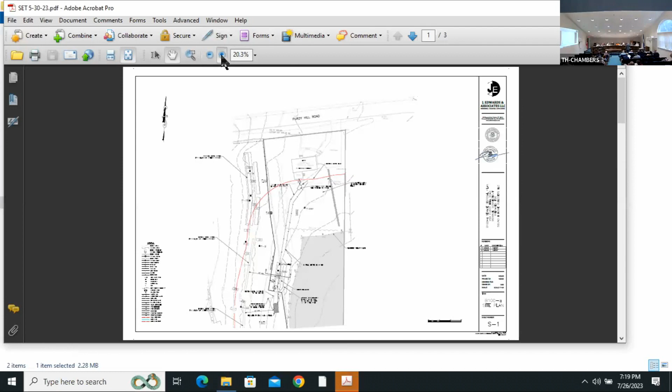Jason kind of went a little overboard the last one because it's just a determination. Yeah, kind of got into the whole detail, so just quickly, it's a little bit of a unique situation.

This is called Crossing. For the record, Jason Edwards, J. Edwards Associates, Engineers Surveyors, 227 Stephanie Road in Easton. Public Crossing is the new condominium development being built on the corner of Purdy Hill Road and Cutler's Farm Road. It has a valid wetlands permit and is under construction, probably 75% complete.

The builder was going to be here, he may show up any minute. But what they're trying to do is, part of that original parcel there was an existing house at 269 Purdy Hill Road. The zoning requires a minimum of 9 acres to do their condo development, so they got approved with 9 acres. One of the conditions of approval was to demolish that existing house.

Now, considering the housing market and the lack of available housing in Monroe and elsewhere in Connecticut, they've decided they'd like to try to keep that house and sell it to someone else, or make it part of the condominiums. They're not sure, but they don't want to demolish it. So to do that, we had to find a septic area. One of the constraints is this existing house.

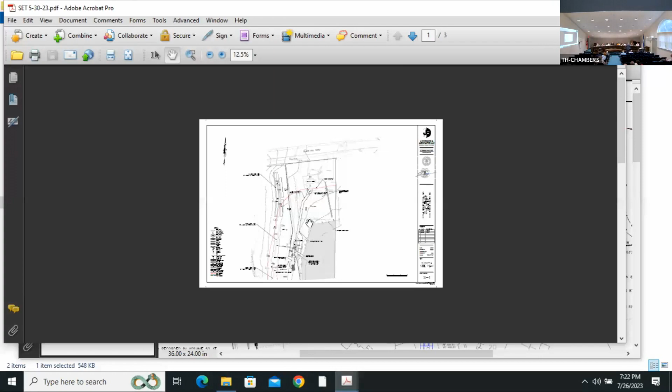So really, there is no regulated activity proposed at this time. The only regulated activity is to relocate the footing drain. There's an existing footing drain that's been installed as part of the approved condo development. So to make enough room, we have to maintain a 25-foot minimum separation distance from that to the new septic, if it's installed.

So we have to slide that over. The existing one is right in there, we have to reroute that pipe and move it over to here, so that they can have that separation distance and have a septic area there. So that's the only regulated activity proposed here. And that's an active site, I don't know, that hill's stabilized, I don't think it's fully secure.

So this is, before you for that movement. And this is also a subdivision, so we have to be before you to review the subdivision as well.

Any questions, I'd be happy to answer.

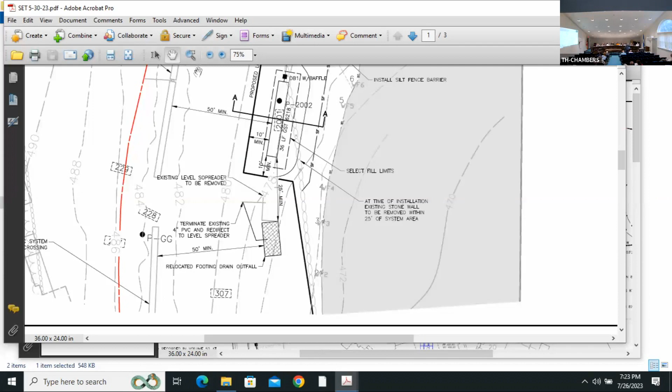One other thing, septic repairs - I know in the past they've been an administratively approved item. If there's a system failure, there was a memo from the former town engineer indicating they were exempt, not from wetlands regulations, but something allowed administratively. I don't know how that bears on this application, but I'll put it on the record. If it's approved, whenever they do it, they just go file it.

Okay, so this is hearing material, there will be a public hearing for the planning and zoning. Motion to go to a regular meeting from Mr. Stewart. Have a second? Second, Commissioner Lyncham. All in favor? Aye. Motion passes. Thank you.

Citizens report recommendation to the Planning and Zoning Commission, IWC 2023-06, file 1449, 269 Purdy Hill Road, subdivision referral, Planning and Zoning Commission. That's exactly what I gotta do, just state that, right? If you want to give a report and recommendation to the planning commission, because they're reviewing it for subdivision right now.

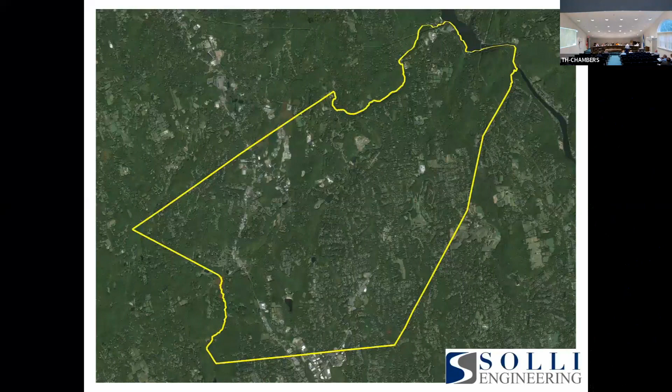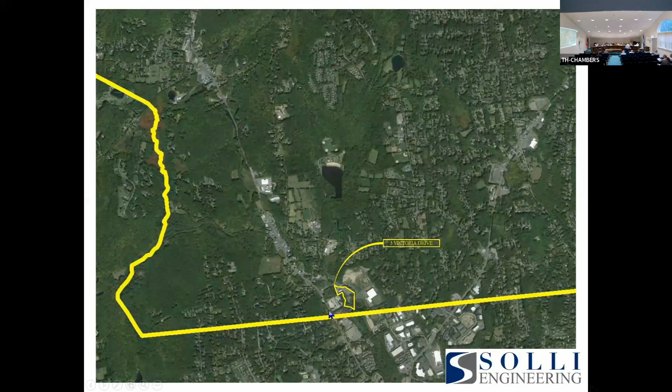We're going to talk about 5 Victoria, which is a proposed field expansion. So this is a map of the town of Monroe, and if we zoom in along the Monroe-Trumbull border, 5 Victoria - if you proceed north on 25 and make a turn onto Victoria Drive, it's located here. It's currently developed as Ole Soccer, a year-round indoor-outdoor soccer facility with various training programs and soccer skills camps. It's been before the commission, I want to say, for the third time now. The first time was the original approval for the Ole Soccer building and the field in the back. There was also substantial wetland remediation and wetland creation done. That was all approved by this commission around 2014, 2015, and subsequently installed, with approvals and sign-offs granted around 2017, 2018.

And also in 2021, there was a proposed 22,000 or 25,000 square foot expansion. We were hoping to get it to indoor-outdoor across the facility, but it didn't work out between the owner and the applicant.

That was also headed for approval about 2 or 3 years ago. Some of you on the commission may remember this application. We are here before you to seek an inland permit for a field expansion.

So currently, this is a little bit about the project. Our client can only hold 7v7 league games in this field. It's just too small for the regulations. So we're seeking to expand it about 15 feet in one direction and 20 to 25 feet in the other, in order to accommodate 9v9 and 11v11, the typical soccer games, if you will.

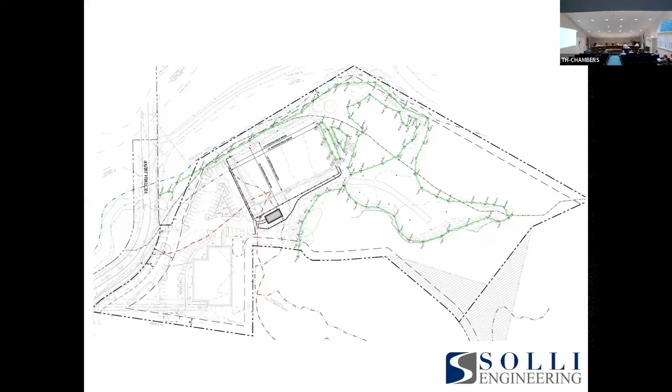Can you give us a better indication of where the expansion is going, in what direction? So if you look here, this faded gray line that runs along the edge, coming out to this, is the new fence line here. And then this gray line here, we're expanding out 15 feet to this new fence line. So it's 15 and 25. Yep. And how far, 26 or 27.

How far is the limit of disturbance to the existing wetland line? So we are grading down, so we can move the swale here, and then there's some grading over in here, but then we're just simply connecting into the existing field topography. So it's a less than half an acre disturbance in the upland review area, and there's no direct wetland impact.

Well, can I ask a question? Go ahead. You're talking about removing invasive species along the river. That's correct. And there's quite a bit here. I'm just wondering, why do you have to do that? Why can't you leave that invasive species? That's a riverbank right there. That's correct, the whole length of that field.

That's just something that was identified as one of the comments from town staff. We listed a bunch of different methods as well for invasive species management. So if the commission wants us to only remove those areas outside of the riverbank, on the other side of the wetland, we're more than amenable to whatever the commission deems appropriate.

What is the method? So there's multiple methods that are approved by Connecticut DEP. We list them all in here, on the plan set, they're on sheet 2.61. There's the manual removal, that's going in there pulling out the invasives. Essentially Roundup, which is a chemical to spray to disinfect it for spot treatment of some of these items. And there's another 4 or 5 different methods that are approved by the DEP that got this landscape approved.

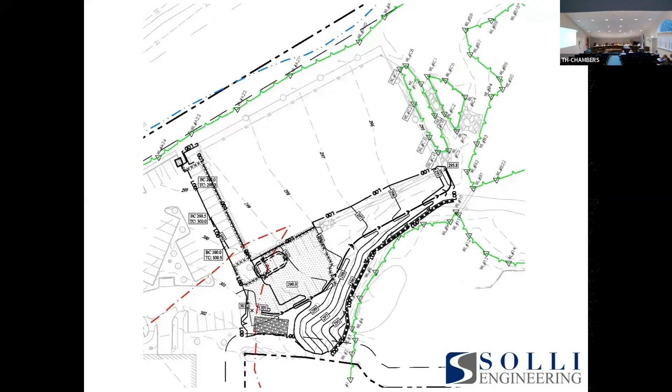So these are growing along the river on the bank? Correct, that green line. Well, not really — it's the check mark line. I have it actually in that orange area. They're growing into the bank. Yes, on the bank.

I don't know about this hatch area, but in my opinion, mechanical removal works, though it loosens up the bank. Then you get rain, you get runoff, and now your fines and dirt are going into the river. I would be for either leaving them or...

I believe when you treat it chemically, you cut it down to the stump, and then you brush something onto the actual stump — applying it directly into the wood, right? I believe so, but I think they can also use a spray bottle. Again, it's listed, but they're not spraying the vegetation of the whole plant to kill it. They're going to cut it and just try to kill the root.

Correct, and that doesn't disturb the bank. Yeah, theoretically, it shouldn't disturb it at all, because whatever grows in its place — whatever species they want — will restore the bank and keep it secure while those stumps rot away over time. That to me is better than either option, because I don't know if the chemical part involves spraying the whole vegetation to kill the whole bush, or just treating a stump.

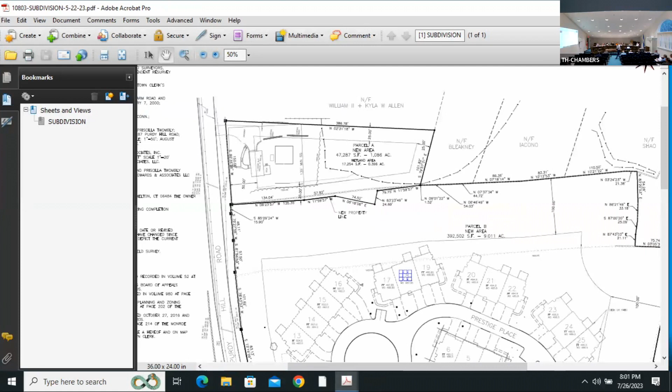All right, moving along to committee uses as of right, IPU 2023-03, file 1451, 228 Pepper Street, town of Monroe Rail Trail. Proposal by the Department of Public Works to pave two existing gravel parking spaces to create ADA compliant access, IW regulations, section 4.2.

Good evening, everybody. For the record, James DeMayo, town engineer. The Parks Department got a complaint requesting ADA parking spaces along the trail. This is at the intersection of Pepper Street and Cutler's Farm Road.

It currently has a processed parking area already. We identified a good location for proposing handicap parking spaces. Essentially, all we're going to have to do is pave the area to make it ADA compliant and stripe it. There's no grading necessary, no other disturbances—just paving that one area that's already being utilized as parking for ADA purposes.

My only question is, shouldn't they just pave the whole trail to make it ADA compliant? They could, but that's not the current complaint. With ADA, we're just required to provide access to all the amenities, which is what this is doing.

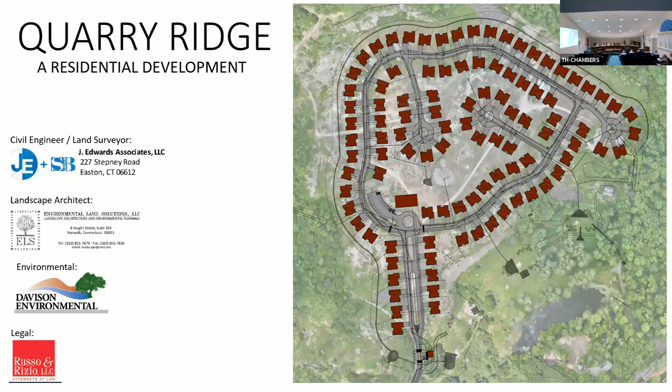This is called Quarry Ridge. It's a residential development, the site of what's long known as the Wren's Quarry. It's located on a 147 acre parcel east of Pinto Lane and Calvert Court, with frontage access on Turkey Roost Road.

It's got a series of ponds along the south and east, as well as wetlands that run southeast from the northwest corner. As you can see in red there, the majority of the proposed development, or really all of the proposed development, is within the former quarry site.

This is just some of the overview. As I said, 147 acres split between 5 parcels. The total wetland area on the property is 15.7 acres. The 99 acres of the property proposed for development is zoned MFR, multi-family residential, which allows for this. It's proposed to construct 99 single-family homes on this property, as well as dedicating 81 acres as permanent open space.

Development's going to be served by public water and an on-site wastewater treatment plant that will fall under Connecticut's Department of Energy and Environmental Protection jurisdiction. Most importantly, no direct wetland impact is proposed. We're all within upland review areas of our proposal.

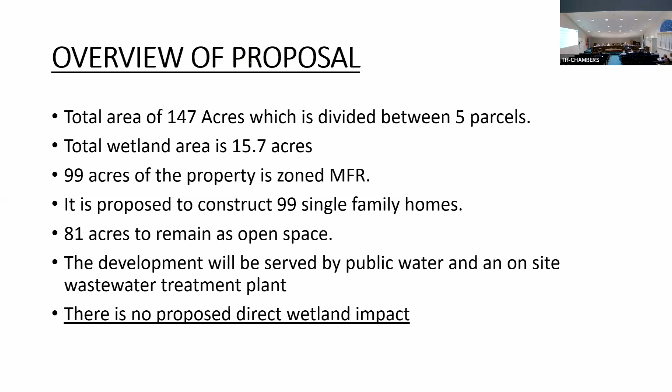Just to take some definitions from the town's regulations, these define a significant impact according to the wetland regulations of Monroe: any activity involving deposition or removal of material which will or may have substantial effect on the wetland or water course, or on wetlands or water courses outside the area for which the activity is proposed. We have no activity proposed within the wetlands, no deposit of material.

Any activity that changes the natural channel or may inhibit the natural dynamics of a water course system - we have no proposed activity which would change the natural channel or its flows. Any activity which substantially diminishes the natural capacity of inland wetlands or water courses to support aquatic plant life - no proposed reduction of the wetlands capacity is proposed.

Any activity which is likely to cause or has the potential to cause substantial turbidity, siltation, or sedimentation in wetlands and water courses. Our design also includes extensive stormwater treatment design and erosion controls that all exceed any guidelines that DEEP has, whether it's the 2002 erosion control guidelines or the 2004 stormwater guidelines.

Any activity which is likely to cause substantial diminution of flow of a natural water course, groundwater, or wetland water course - none that will reduce the groundwater flows. And any activity which is likely to cause or has the potential to cause pollution of a wetland or water course.

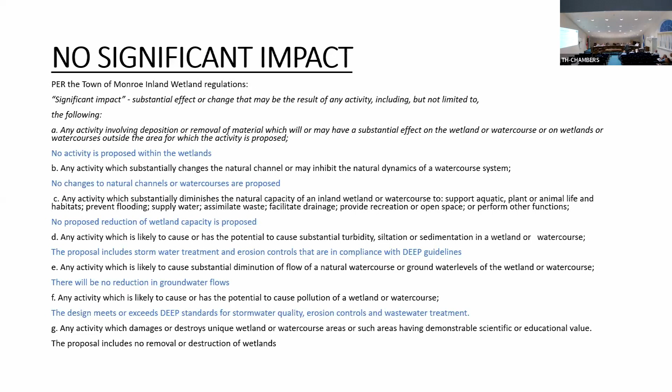Just to give some history, this was, as I said, the former Wren's Quarry. I believe it was started back in the 1940s illegally - there was no permits for that. It ran afoul with the town on and off. In 2003, the current owner purchased it and came in with plans to remediate the site. In 2006 those were approved, and he began work on the remediation, completing it to what it is now in 2010.

At that point, the economy had fallen off a cliff, and the financial viability of building the homes didn't work, so everything sort of paused. So really, the site's as it was left in 2010, stabilized and kind of barren since then.

Can you go back to that, please? Yeah, I've got it on the next slide.

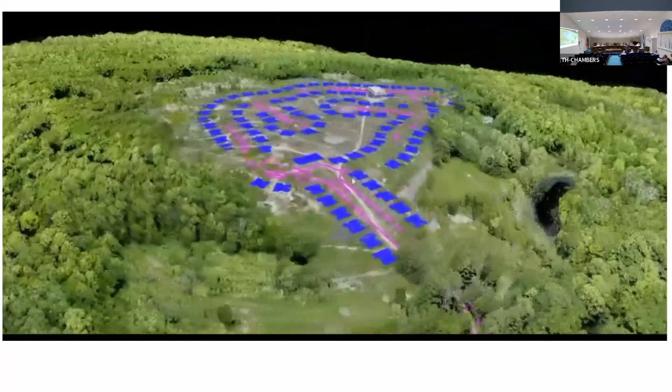This is a little bit shakier camera, I apologize. But this is, the blue is where we are proposing all the homes. Purple would be the road. It's tough to look at with the jerking so much, but you can see it's all within the disturbed area. We're not proposing to construct any homes outside of what's already been disturbed. That was the intent of the original remediation, to create a site on which we can then come back and construct the homes and limit the disturbance outside of this area.

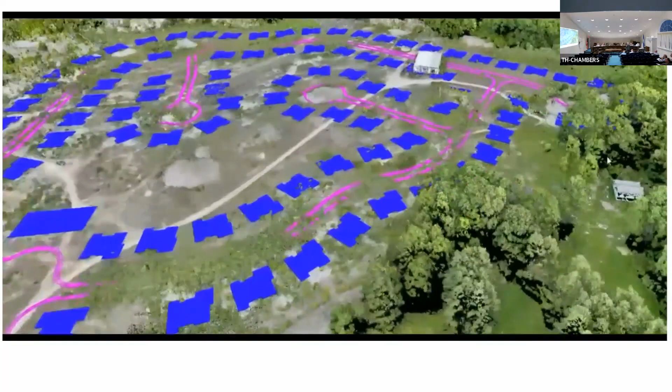So you can also see, go back after this, just to show how much open space there is surrounding this property and how much we're preserving. If you look here, you can see it's a vast amount of green around this, and we don't plan to take virtually any of that down. There's a small area by where that rock outcropping is in the top left corner, where a septic area is to go, but beyond that, it's going to stay.

You can see, you can't even see any houses in the distance. I think the closest house is about 1,200 feet away from the edge of our development. So that area there would all remain open space. That's the 80 acres of open space that we're proposing. The far house, that's Pinto Lane in the distance.

So that access drive you see coming down the hill there, we're going to be following that same path to come up. We have to improve it, widen it, make the grades conform to the town standards in that range. But essentially, we're following the exact same path.

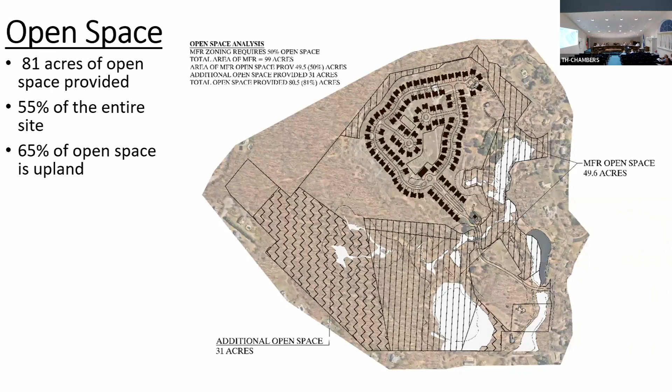So again, just to touch on the open space, and I think that's a key point of our application, is that the open space provides as much, if not more, protection to the wetlands than any other remediation or mitigation or prevention of impact. Providing this amount of space surrounding the wetlands is, in my opinion, the most impactful effort we can make to protect the wetlands. We're proposing 81 acres of open space, 55% of the entire site, 65% of that open space is actual uplands, not wetlands, area that could be otherwise developed.

Again, just to reinforce that point, this is from the NEMO website, which is the Center for Land Use Education and Research. This is a quote from that site: permanent protection as dedicated open space is the ultimate way to ensure that riparian corridors and other critical areas throughout a watershed continue to perform their important functions. Open space acquisition by municipalities and nonprofits like land trusts continues to be the foundation for land protection in Connecticut. So, like I said, as they state, it's the ultimate way to ensure protection.

Just to outline what our limited regulated activities are.

And then we are proposing a small water quality basin to capture the runoff from that area and treat it before it enters into the pond. That design has all been provided, the calculations have been provided, and it's in line with DEEP guidelines.

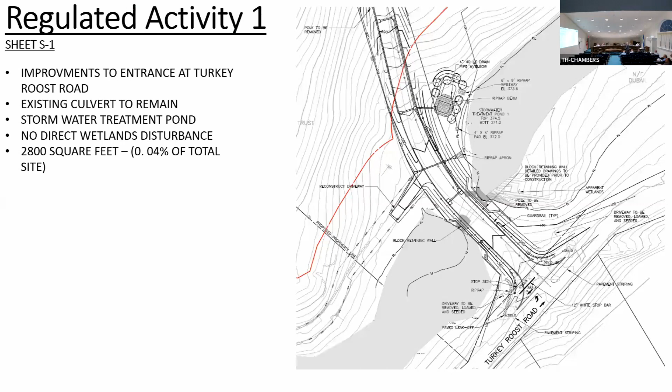No direct wetlands disturbance is 2,800 square feet of regulated activity, which is 0.04%. So that's 4/100 of the total site.

This is activity number 2. Again, it's at an existing culvert, very similar to the last one, really. We're crossing the pipe that's already there. We're not expanding that culvert, we're just filling on top of it.

We have no direct wetlands disturbance. This drainage is piped back up to the ponds on the top right of the screen there, goes out through that pond. This one, we have 12,000 square feet of upland review area impact. That's 0.2% of the total site.

This is regulated activity 3. This is our water treatment ponds. We've got 3 of these proposed in this area. Only one of them, the actual pond, is in the review area, which is the one on the lower left of the screen.

There's new piping, standard stormwater basin materials. These are necessary to treat stormwater before we supply out into the existing pond system.

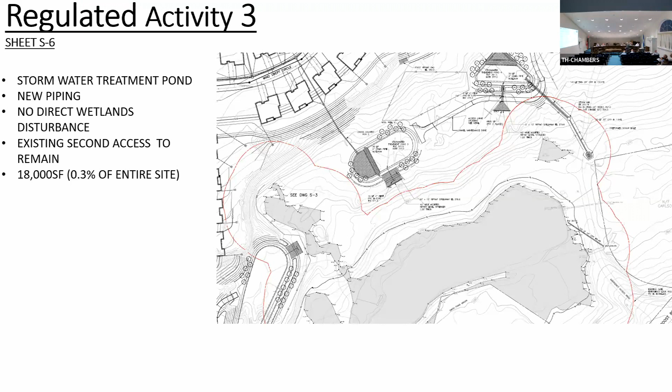This is 18,000 square feet. This is our largest upland impact, upland review area impact, and that's 0.3% of the entire site, so 0.3%.

This is number 4. This is associated with one of the wastewater absorption areas. We're about 80 feet from the wetlands with that. Really, the disturbance is going to be grading.

The one thing to keep in mind on this site is we have a more detailed plan, but there is a wastewater treatment plant, an on-site sewage treatment plant proposed, and according to DEEP's statement here, that water is good to drink by the time it exits - safer for drinking after it exits that plant.

I don't know that I would drink it, but it's safe for drinking. So by the time it gets to here, it's treated water.

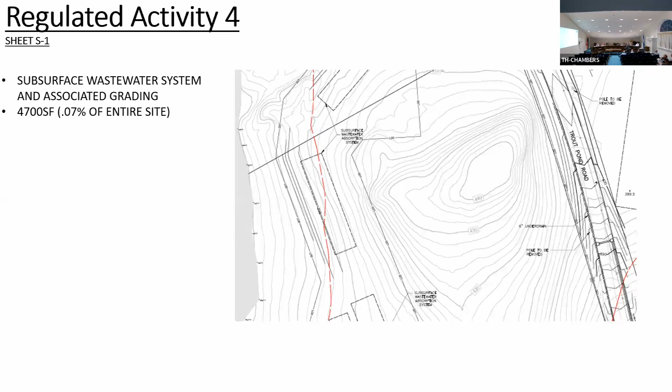This is actually some statements from our environmental scientist. Eric, are you on?

Yes, I am. Do you want to go through this quickly? Sure, yeah. Can you hear and see me? Yes. How are you doing, everyone? This is Eric Davison. I'm a wetland scientist and soil scientist at Davison Environmental, practicing out of Chester, Connecticut.

Just briefly to go through the wetland impacts, everything I'm saying here on this slide is included in my wetland functions and values report, which was submitted to the commission. There are 2 wetlands on the site.

Wetland 1 is the very small isolated wetland in the northeast corner of the site. Referring to that plan sheet you were discussing earlier that shows the wetland delineation from the previous delineation and the present, setting aside the error with the red line there.

If you look at that sheet, the wetlands are numbered. So if you're not sure where a wetland area is - but wetland 1 is a very small isolated wetland in the northeast corner.

It's entirely created from the former quarrying activities. Wetland 2 was used to denote the remainder of the wetlands on the site. So it's a very large wetland system, but we kept that designation because all of the remaining wetlands from the east side to the south side are all interconnected.

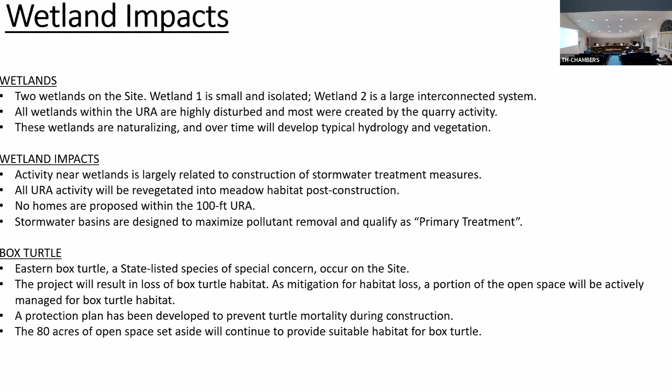So just to circle back to the design on this site, we have a wastewater treatment system proposed that is anticipated to have an average daily flow of 40,000 gallons per day. For the commission's information, any wastewater system design over 7,500 gallons per day is regulated by DEEP. I believe there's a letter in the file from the Health Department confirming that.

This is a bit of a unique situation because this was approved previously for development. We have a current DEEP approval for 20,500 gallons per day, which includes one of the wastewater absorption fields and the entire sewage treatment plant. We've also identified two other areas and done extensive testing to determine we believe we have a capacity of 19,500 gallons per day that still needs to be approved by DEEP. The system design incorporates an on-site sewage treatment plant. This is just a snip from the public health code that explains the jurisdiction I just described.

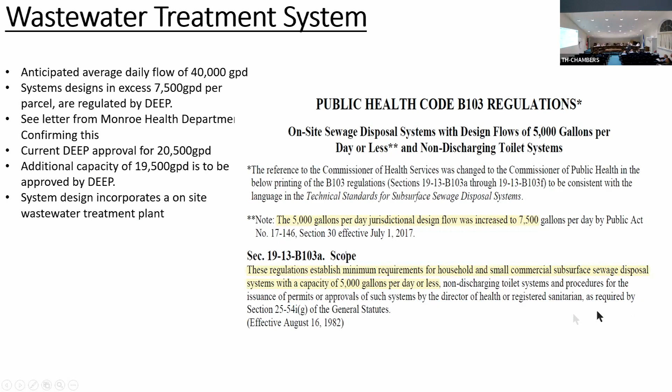So you're going to need to put another treatment plant in at some point? No, this treatment plant is sized to handle this amount - they oversized it when they designed it. So we have to put in two more fields for absorption, but the treatment plant, unless DEEP says otherwise, should remain the same. Do the plans show the other absorption fields? Yes, they do. I'm going to have to go through those.

I have another question. You said 40,000 gallons per day - how did you come up with that figure? It's average gallons per day, based on the number of bedrooms. Right, so there's 297 bedrooms - the prior approval was for a senior living facility, right? Is that why you're changing the calculation? Yeah, there was a different formula applied at that time because it was age-restricted, so it anticipated less water usage. So they allowed for more houses with lesser gallons. Now we're coming with basically 99 four-bedroom houses, so you have 396 bedrooms. It would be 396, yeah.

Right, so again, this is the wastewater absorption area that is approved by DEEP. There's no proposed regulated activity associated with this. You can see where the red line is - that is the upland review area. Wastewater is fully treated before it gets here by the treatment plant.

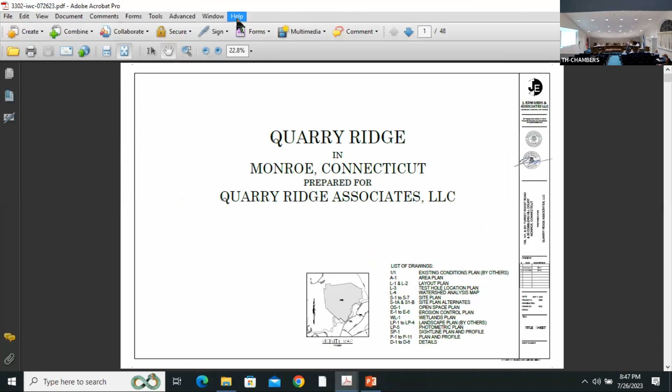So this is kind of just an overview of the site. We're proposing all the homes in this former quarry area. We then have this first absorption area down here along the existing driveway.

There's a now abandoned home here with a yard, and this is naturally occurring soils here, good soil. We then have another wastewater absorption area up here in the back, also in natural ground.

And then the third one is down along this edge here. Again, there's an existing house here, but this is all natural, undisturbed ground. So we'd be going into natural soil.

You have a question? That's a pond, right, next to where you just indicated? If you go east from the road, you get to the shore of the pond. Yes, the pond is over here.

So the closest we get to the edge of that pond is 80 feet with one of the absorption areas. You have Smith Pond, and what's the name of that other pond? I don't think it has a name. It would be good to put names on them. There is a designation for the new ponds and the ones on site, that's off-site.

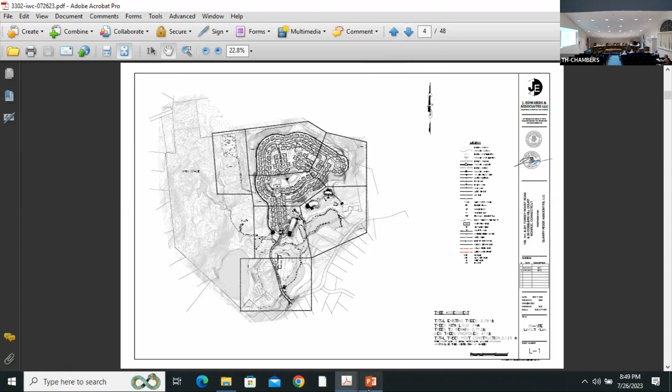Any other questions on the locations of those on this sheet?

So that was the first area, along the driveway coming in. The second area is along the pond that you just mentioned. There's one spot there that gets close to the pond, the rest are all a bit farther away.

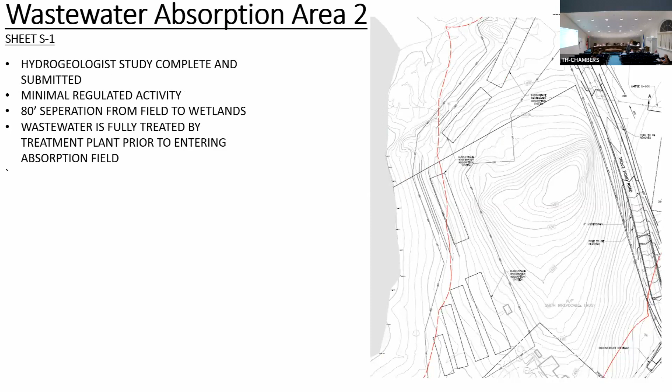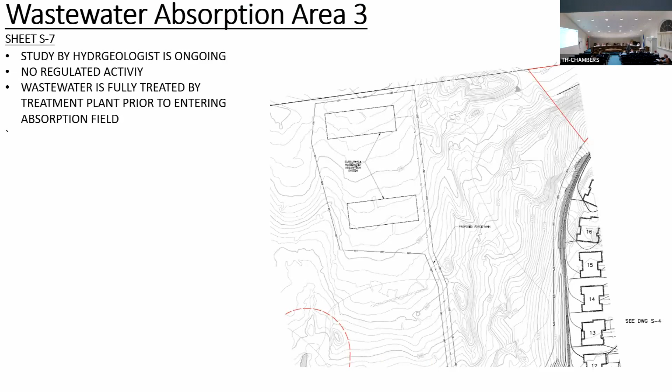And again, according to DEEP, the discharge from the plant is fully treated to DEEP standards prior to leaving the facility.

Just for some information on the treatment plant and the effluent qualities that are required, this is from the DEEP design manual standards, and these are the values that the treatment plant has to meet for pollutant levels, and the design does do that.

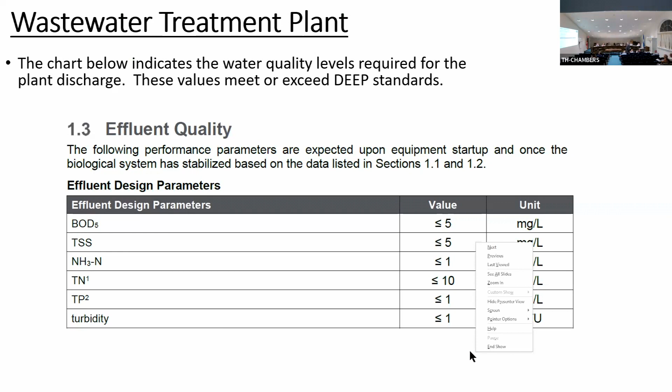This same treatment plant package was formerly known as Zenon. It's now Veolia. It's changed companies, but it's been installed in various places around the state.

There was a study done by DEEP just a few years back, but this was a quote from the study: groundwater monitoring located within the zone of influence of the permitted systems has continued to consistently show levels of total nitrogen, total phosphorus, and coliform suitable for drinking water and other domestic uses without further treatment, and do not appear to be cause for concern.

So they're essentially saying that it's fully treated by the time it leaves that plant, so you're putting clean water back into the ground. And those systems have been functioning for over a decade now.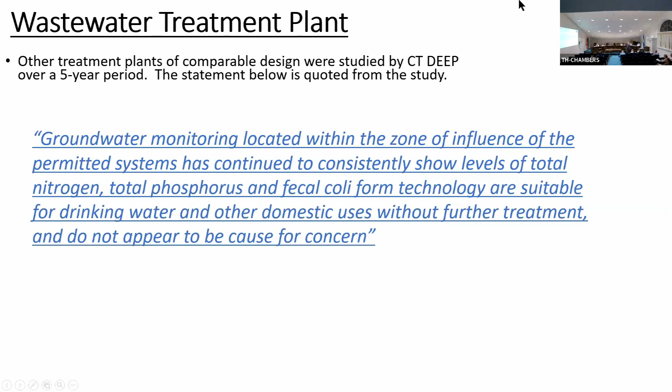Just to give a breakdown of the differences in what's required for a DEEP system versus a state system: like I said before, the DEEP standards apply to anything over 7,500 gallons per day. DEEP design requires a very detailed hydrogeologist analysis of the groundwater movement. They do studies over months, take readings and detailed calculations, which we've provided as part of this application to determine how that groundwater is moving.

Whereas the state health system, you need to dig a couple test pits and determine the groundwater depth, and that's just a static elevation.

The standards are site specific for DEEP, so there's no set standards. There's guidelines, but you have to design to what the site allows. For state health code systems, you have a one-size-fits-all approach; you have a standard manual and you design based on that.

DEEP requires that all systems, the majority of systems, be monitored quarterly for the life of the system. So my office does that with a dozen systems around the state. We go out and measure, take readings on groundwater and measure depths of effluent, and that goes on quarterly.

The permits must be renewed. I think they changed the timeline, but it's around every 5 years that you have to go back and renew your permit.

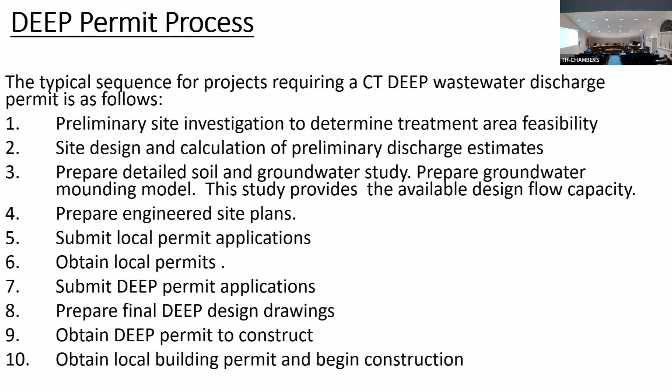This is just a confirmation of correspondence that I have with DEEP, from Lauren Jones, who's the supervising sanitary engineer for the division that regulates wastewater treatment in DEEP. She essentially confirms what I just said, that the local approval process should begin first, and that if anything changes in the local committees, we'd have to go back to them.

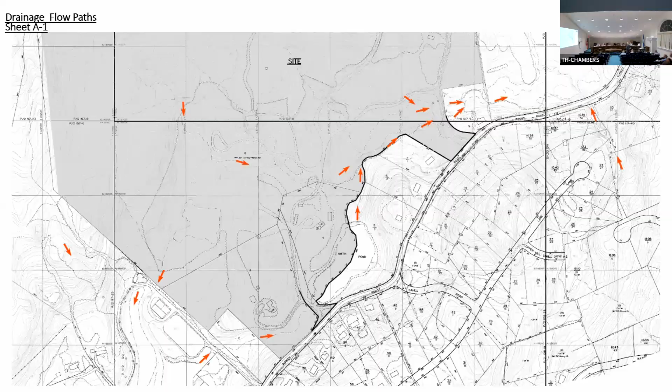This shows the drainage flow paths on site. Next is the watershed map - this is new, something that was requested by the town engineer. So we prepared that, and it'll be in the revised plan set for him to review, but just to give a rough overview of the watershed areas here.

We don't have that yet. You don't have that yet. No, I got it - it's in the box over here. Which I can skip past this if you'd like.

You've got an area here that drains down into Smith Pond and Smith Pond Brook. You've got this area here - I'm going to read it at this scale. It drains down into, that's the proposed area, I'm sorry - so that's going to drain down into the western basin. This goes into the center basin, and that's this area in the middle.

These are the new stormwater basins. And then this area here comes down to this pond. All of the stormwater then comes out of outlets of each individual pond.

You've got 3 large stormwater ponds here, the water quality ponds. They each have, as I said, an outlet. These 2 fully outletting to this wetland, this pond. This one has a split outlet that comes from in this direction, and then a pipe that goes out beyond the pond - there's a reason for that in our calculations.

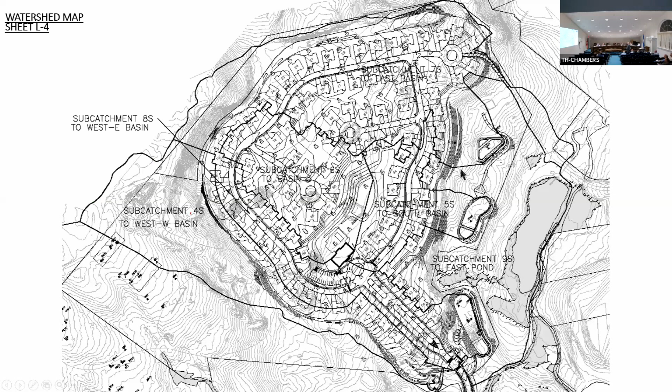The town engineer will review that with us.

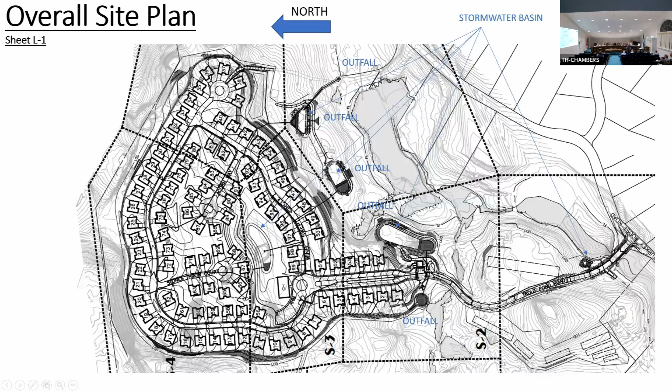We've made changes to that outlet in the latest plans. I have information on that for the town engineer.

The design of the proposed development will increase the amount of impervious area on the site, resulting in higher peak runoff rates. However, the water quality treatment, as we've designed it, results in original flow patterns being maintained, and there will be no increase in peak runoff for the 2, 5, 10, 25, 50, and 100 storm events. This is just the breakdown of those numbers, and it's all in the drainage report.

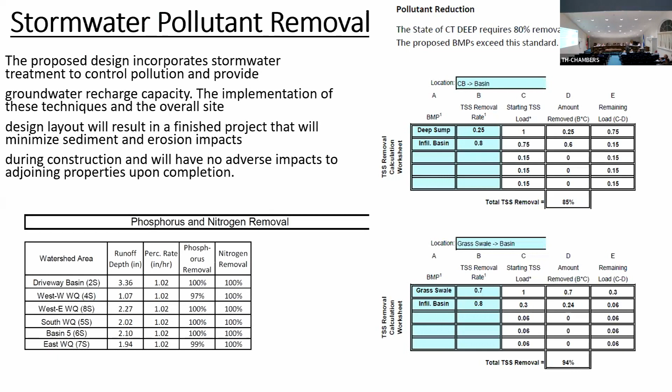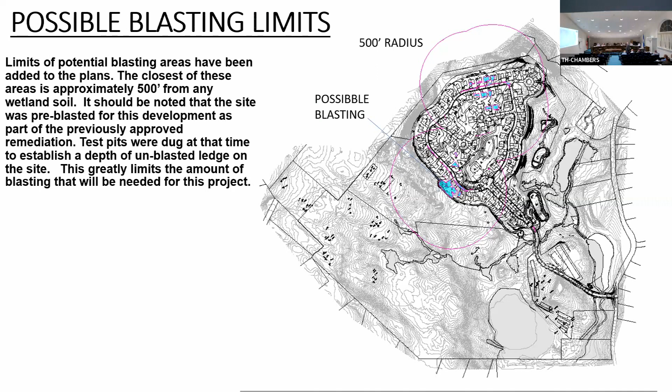Again, we're in compliance with the 2002 guidelines for soil erosion and sediment control. GD1 includes our stormwater pollution control plan, site monitoring schedule, construction sequence, and owner and contractor certification statements.

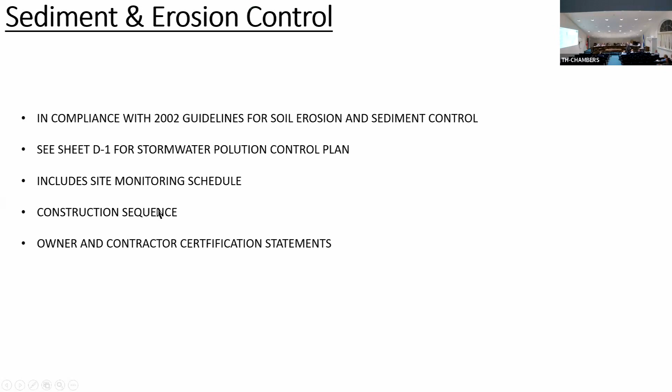And this gets to our alternatives. This is alternative one, which we are proposing as an alternative.

Same 99 unit development that we have today, but because that 30 Cobbler Court piece is a separate parcel with 30 acres, we could also develop that. In this case, we're showing a large apartment complex, I think it's a 196 unit apartment complex. Similar projects have been approved recently that have gone through the approval process through the state health code.

That big rectangle, that whole area is as big as the condos, the apartment development, so we would have that whole area to work with as well as beyond. As far as the stormwater area for the existing development, that would be the same as what we're proposing. That's alternative one.

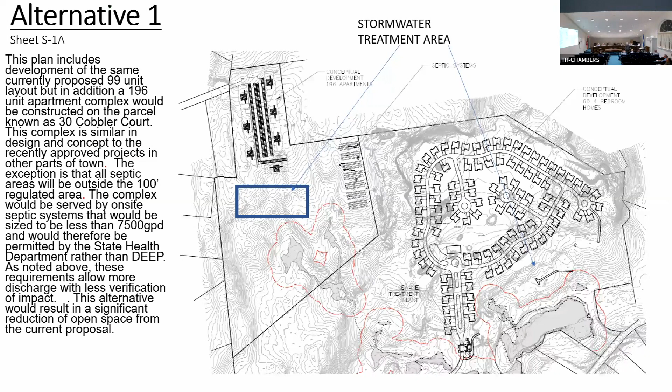Again, this stormwater treatment is a large undertaking to fully design. So we feel that's a bit more than should be required for just an alternative concept plan. We're not planning to build that now, we just want to demonstrate viability.

That's what we like. Alternative one is essentially not changing anything about the plan other than adding the additional - we removed the open space essentially and built on the open space. The houses are all the same amount of houses.

So if we think this is bad, then that's worse, right? That's right, put more people in the same amount of space. Yeah, that's what it gets back to.

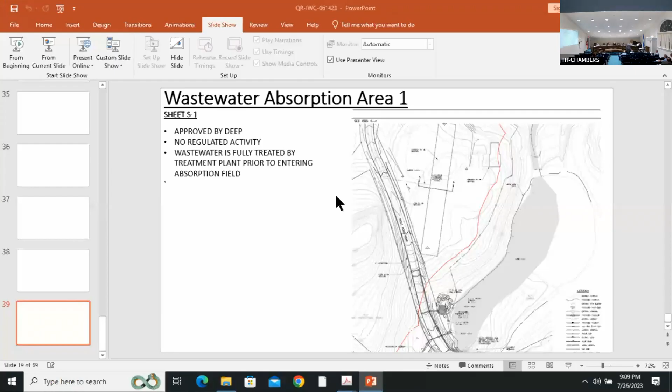This is also in response to the Arcadis report? Yeah, it is, from our engineer and the conservation commission. I'm going to start with the Arcadis report.

I think that answers some of James' questions. Sorry, Russ, are you with us? Is Russ with us? I am, I had to find my mute button. Okay, I just want to make sure you're here listening to their feedback to your report. Absolutely, and then we'll get to you after they provide some comments about that. Okay.

So this is the report, you have this paper copy we just handed to you. We received the letter from Arcadis, from Russ Fiorenzo, July 20th, and we reviewed it and prepared responses. His first statement was, 'I have completed my hydrologic review,' and he states that there are 90 detached homes on 106 acres. The proposal is actually for 99 homes on 147 acres, 80 of those acres will remain as open space.

He also has a longer paragraph, I'm not going to read it all, but he says that this application is very similar, not much has changed from the previous application, and we don't really agree with that. We think there is some significant change. We've added 9 additional homes, and we've added 80 acres of permanent open space, 65 acres of that is upland.

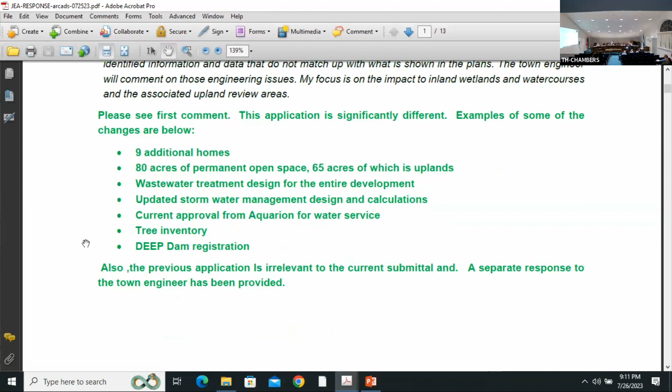We provided wastewater treatment design for the entire development, updated stormwater management design and calculations, a current full serve letter from Aquarion that was submitted, a tree inventory, and a DEEP dam registration. Currently, I do believe that the previous application is really irrelevant to this current application - it's a separate application that should be treated separately. A separate response has also been provided to the town engineer, as he states they had similar comments.

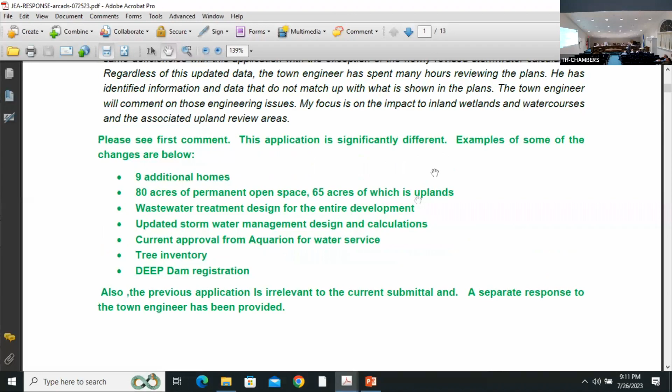It says the primary challenge with the proposed application is the lack of soil on site to allow infiltration of stormwater. The site is mostly bedrock because the soils were mined in the past during quarry operations. The lack of infiltration requires complicated engineering to treat stormwater. The plan proposes several detention basins that will overflow.

This statement is inaccurate. The total subject property is 147 acres. As I said before, only 44 acres have been mined. So there it is.

This whole development is also within the former quarry site, with the exception of the stormwater infiltration areas and the wastewater infiltration. These areas are designed and constructed soils that provide adequate infiltration.

The 2004 CT DEEP stormwater manual defines infiltration as groundwater recharge volume. Per the submitted stormwater management plan. Required groundwater recharge volume is 16,990 cubic feet, and we provided 85,569.

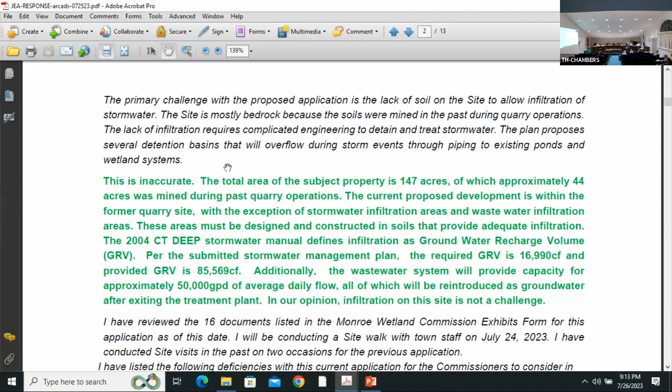In addition to that, we're also going to be providing the wastewater infiltration, which is fully treated water, that could be up to 50,000 gallons per day at a maximum. So that will all be reintroduced as groundwater. It's our opinion that infiltration is not a challenge on this site.

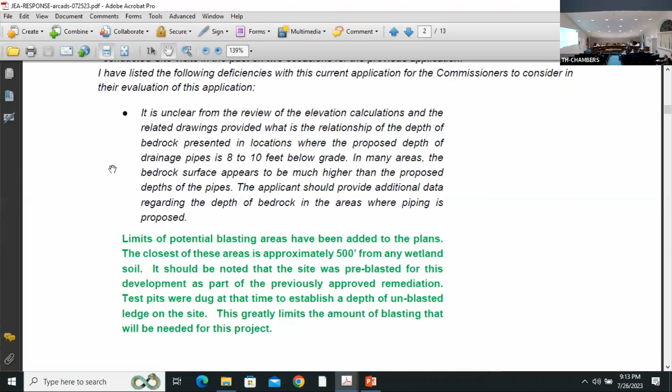This refers to the blasting. Again, we've identified the areas for potential blasting, and he did not have that information when he did this, so we're not providing that. Closest area that he feels may need to blast is 500 feet from the soil. The site was pre-blasted for development, and test pits were done then, so we established that layer of rock that we need to deal with, which is going to greatly limit the amount of blasting.

And this statement is kind of a broad statement that blasting could affect the wetlands.

Can I jump in for just a quick second here? Because I'm just kind of scanning through this. If we go through every comment in detail, we're going to be here till midnight. Yeah, so I think it would make sense for us to take this and review it. I mean, if we have questions, we can go through it because I do agree, I think Jim is going to have to review your package in many ways, right? So I think we should give it its due course and go through this whole thing properly, and I just think it makes sense for us to go through it separately.

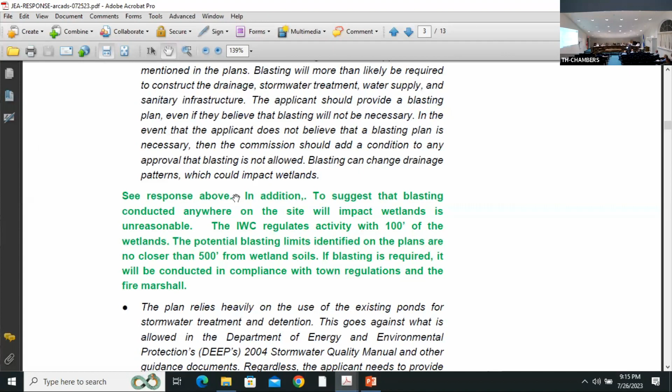Mr. Edwards, what I'd recommend is just kind of broad stroking the big ticket items that you want to make sure you drive home to the commission. You want us to do that tonight? If you want to give us like a 5-minute overview of, hey, we hit these points, make sure you see that. Because I'd like Arcadis to have a chance to make some comments tonight as well, and also let the public chime in. So I'll skip ahead here. Then the blasting issue we touched on.

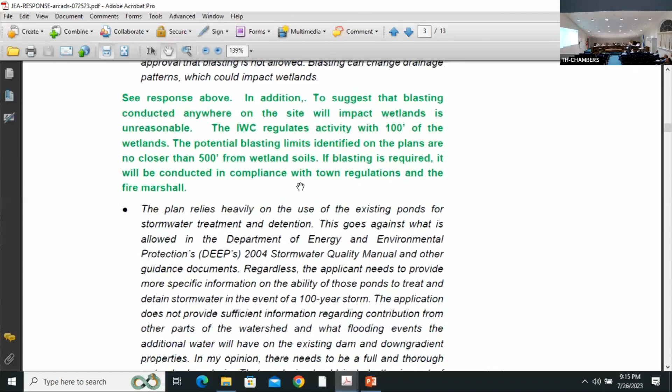Just want to make sure I'm responding to the right one. So this is also the town engineer's comment on the existing pond and the use of it in stormwater treatment and detention.

All of our water quality treatment is done upstream and complete, and we have the full water quality volume in our basins. The calculations do include the stormwater pond, the existing pond, for detention. But that's a man-made pond that was created as part of the gravel mining operation back in the 60s, sometime around then. There's a concrete outlet structure, and it's designed to act in that fashion, in our opinion.

And just to quote here from the stormwater quality manual, it's a guidance document, it does not permit or prohibit anything. We have free range to interpret it, and in unique situations, different approaches apply. We feel that the use of that existing pond is warranted here.

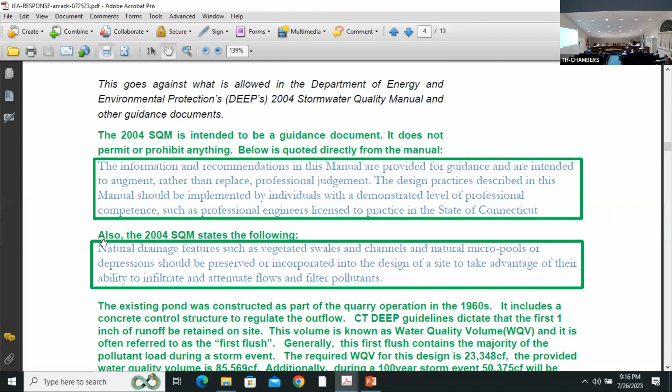And again, the 2004 manual actually specifically says that drainage features such as vegetated swales, channels, natural micro pools, or depressions should be preserved or incorporated into the design of the site to take advantage of their ability to infiltrate and attenuate flows. So we're in line there. We don't know anything in those guidelines that specifically prohibits it. So we feel it's good use of the existing pond.

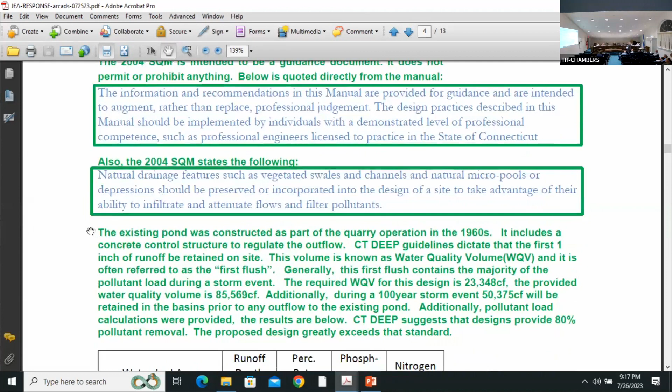One more point here is that we've got a required water quality volume for the design of 23,000 cubic feet, and we're providing 85,000. During the 100 year storm event, nothing leaves those ponds until we get to 50,000. We're storing more than we are required to for water quality. And again, we can review these calculations with James.

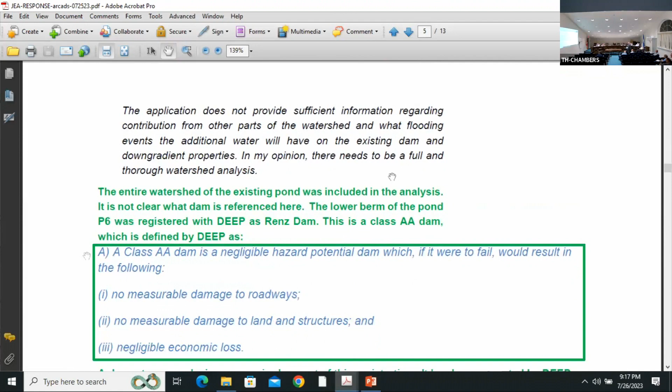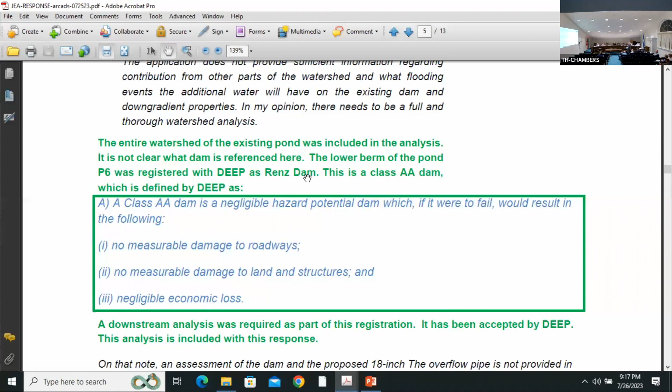This is in reference to the dams. We did consult DEEP and register that pond dam as a dam. We don't have a registration number yet, but we have correspondence with them. So we submitted that information to the application. Sorry, with this latest submittal, I submitted that dam report. It also included a downstream assessment.

All right, so again, let me try to summarize here rather than, because we're going to read through this. I don't want you to think we're not going to, but...

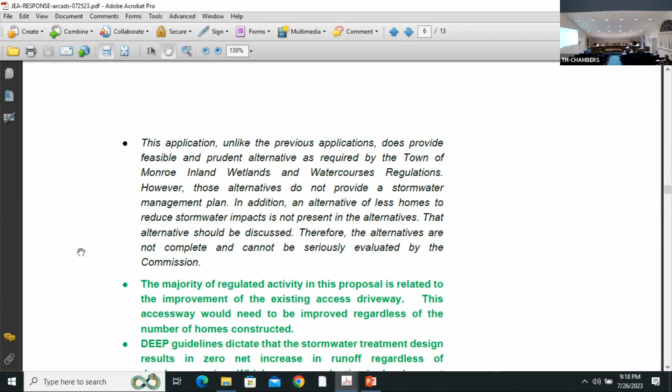The attorney has to talk some. But I'll be brief, Chair. Commissioners, Chris Russo with Russo Lindsay offices at 10 Sasco Road in Fairfield.

Jason said it all, but the only thing I would add is that we feel this is a tremendous opportunity to reclaim the site, which has a very long history. Fortunately, my client bought this property and solved an issue where it was littered with violations. It was really troubled, often referred to as a moonscape. Now, with this plan that Jason's prepared, we can really reclaim this land and add great benefits. Just the tree inventory itself - being able to take down 75 trees for this development and then replant over 400 - is one thing we think is an incredible transformation for this property.

If I can zoom out to a town-wide view, I think this is apparent to everybody who lives in this state: there is a tremendous demand right now for housing, and a tremendous need for housing, felt everywhere. I've done a 300-unit application in Bridgeport and a 300-unit application in Cheshire. Cities, towns, everywhere, there's this tremendous demand for housing. Monroe's POCD references the demand for housing that Monroe faces and the need to create more units. If you look at that demand and look at this project, this project can supply 99 units to meet that demand.

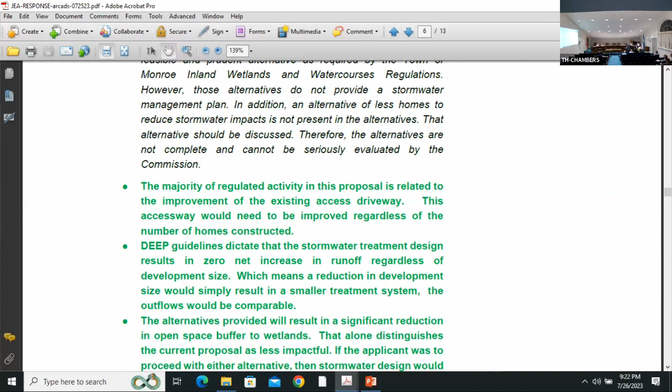Then I guess we'll conclude our presentation then. I'd like to get some comments from Arcadis right now. Yes, so Russ, if you're still around - I'm still awake, okay. So obviously you're going to have to get a copy of the comments they provided based on your report as well as the town engineer's report. So maybe you want to keep it a little brief tonight until you have an opportunity to read their comments, but feel free to add what you need to add tonight, and then we'll go from there. Right.

Well, obviously, I appreciate that they responded to my comments quickly. They did come up with a better tree plan and a blasting plan, and it did address many of the comments and concerns that I have. But I haven't had time to absorb what they've said tonight or read what they've said, and we could do that going forward.

My biggest concern with this application is the amount of water that's going to be going into the pond. They're basically treating the pond as a detention basin. They say that the pond is almost back to a natural state. But what I've seen at that pond, I was there Monday, it's a vibrant wetland system. We saw turtles, probably box turtles, and all kinds of wildlife. The ponds are pristine wetland systems.

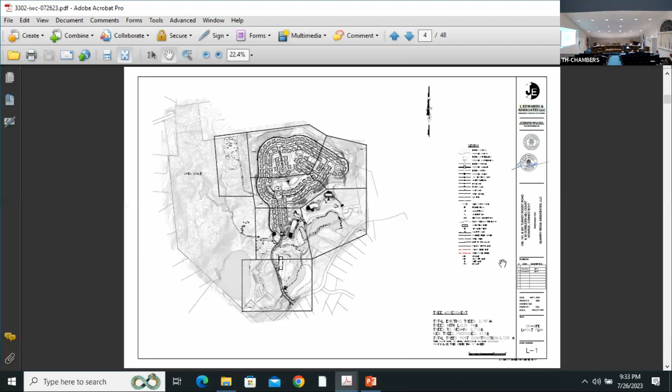Eric Davison: the Natural Diversity Database application process has not been done on this site. It's typically done when you file for a stormwater permit, because you need Natural Diversity Database compliance for a stormwater general permit. We can file the application now if the commission is interested in seeing what species come back other than box turtle, but we have not filed it yet, since it's usually part of state permitting after local permitting is done.

Just to clarify, several people said they saw box turtles in the ponds — but box turtles are not an aquatic species. If you were seeing turtles out in a pond basking, those are not box turtles, most likely painted turtles. Box turtles are not a wetland-dependent species; they don't live in the wetlands or the pond, although they will sometimes go into wetlands, particularly when it's hot and dry.

In terms of the box turtle surveys, DEEP generally doesn't require, they used to, but they no longer require, when you go for a stormwater permit and box turtle records are in that vicinity of the site, actual on-the-ground surveys. Rather, they require the protection plan, which is why I proactively put it into the project plans, because I anticipated that if we were to go for state permitting, they would require that protection plan. So I hope that clarifies a few things on the box turtle issue.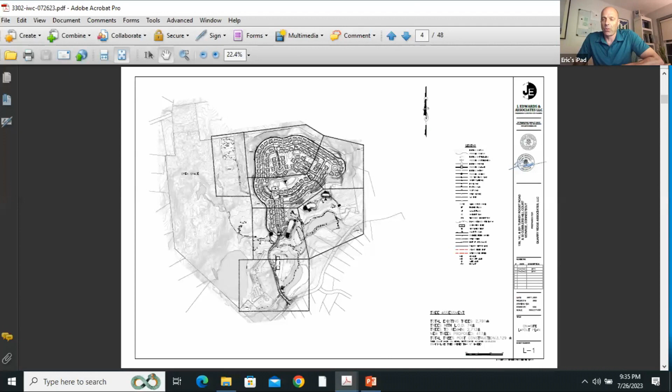But in terms of the site use, yes, they could be anywhere in the open gravel pit area of the site. But generally speaking, they like edge habitat, so they're more likely to be concentrated along edges of forest and open areas, as opposed to out into the open areas. Hope that helps. Thank you.

Can I quickly just respond to the comment regarding feasible and prudent alternatives? We'll have more to respond to it at the next hearing for this. But one thing I wanted to highlight is that this project covers 147 acres. It is not just the area we're developing. I kind of got this too from the comments submitted from the expert, that it almost glosses over the fact that this proposal proposes to preserve 81 acres, which is obviously a significant habitat area.

That is buildable area. That can be buildable area. And so to offer that amount of area for open space is significant. And that's why we feel that this is the most feasible and prudent alternative.

I think from the comments that we read, what they're driving towards is a development with fewer units. But the important thing to remember is whether it's 99 units or 80 units or 70 or 60, there is going to be an outflow of water. This is something we can show and speak to at the next hearing, but as far as work in the regulated area, there is not going to be a substantial change by the change in the number of units. I just want to highlight that because I saw that from the comments, including from staff, but we'll come forward next time to go further into depth.

Good evening, Ron Sedonic, I live on 20 Morgan Lane. Could you do me a favor and just bring up the slide that showed the trees? Yeah, that's this slide.

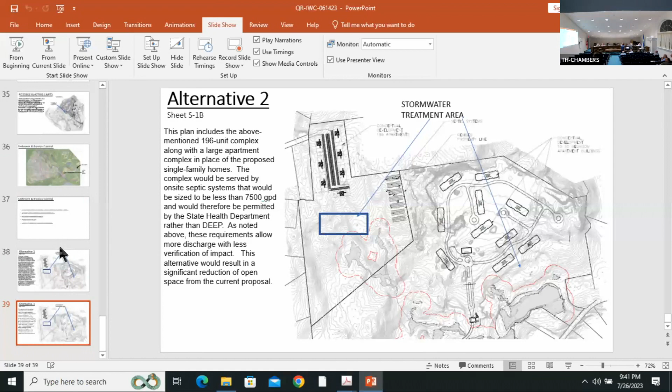On the green dots, that's that. Okay, so, yeah, so, I guess that's the northwest corner. It says open space, but there's a line you can barely see, right? That is an area that's not open space that comes off of Cobbler's Hill, right? And right now, I don't know if you're coming back with a different proposal for that area, because right now you're showing it as not open space, but still all the trees. So my question is, what's happening with that space?

And is that part of this discussion? Because right now it's presented as if that was going to remain trees, but I'm not sure that's the case. I'd like to get that on the record, because my property abuts that piece right there. Can I respond? Yep.

Jason Edwards for the record. That is not part of this proposal. We're not proposing to do anything there at this time, but it is separate — the plan is that the open space ends at that line. Perhaps you can define for him the term open space, because he may be interpreting it differently than you. It's preservation of land, but the lot at the top is going to be a separate building lot, that someone could eventually build a house on in the future.

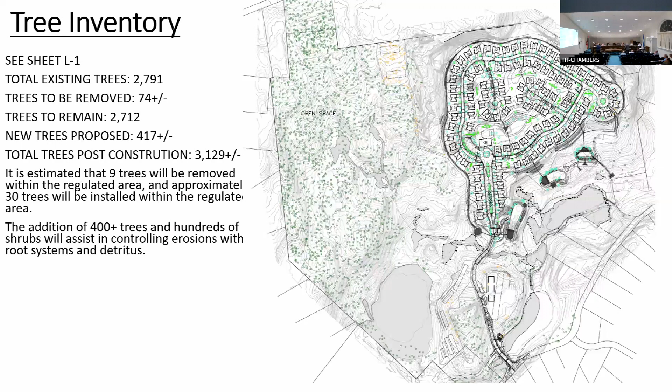Oh, now we're gonna put an apartment building there. It's listed as open space and it's granted to the town as open space. No, it's not, you can't see the line. This is open space, there's a line, very hard to see with the tree. I can explain it. Where there's a section, I think it's 4 acres above there, that's not open space. If you see the road coming off the left top, it goes into that section. I can maybe clarify.

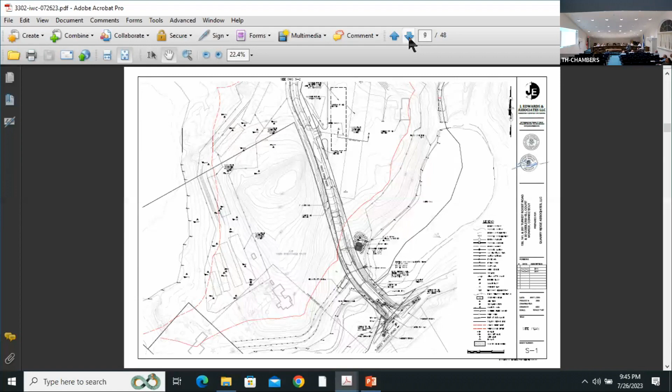Sheet OS1 is the one you're looking for. Thank you. So this is part of our submittal, and it shows the open space areas. The intent here is to leave one lot at the end, your lot, that could have the intent to build a single family house on. That would be accessed from, but that's not part of this application. That would be down the road. Right now, there's access to that open space to the public, through that cul-de-sac, to bikes and everything else. They don't want that access into this development in the future. It's a problem.

For zoning, you could only build a single family house there, with some sort of restriction. That's not included in the multifamily zone. No, it's not. Okay, so that's simple. Also, there's a restriction on that cul-de-sac that limits the number of lots you can have on that street, and they're at that limit. So they cannot subdivide that without some sort of zoning waiver. So it's one lot. To build apartments there, you couldn't build what we were showing on that 4 acre parcel. You don't have a septic area, you wouldn't have nearly the room for it. And there's no intent from our side to do that.

Maybe somebody can enlighten me. Sure. We do have just a rough analysis, a simple analysis. We did a detailed analysis, but we had to have the final numbers on the plans. Gotta figure out what sheet it's on. L3, all the way up. Thank you.

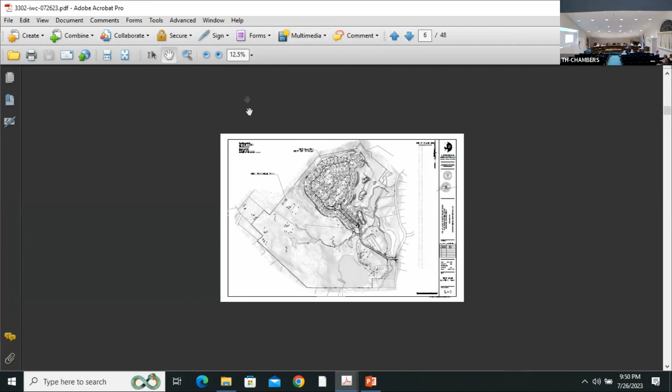We have a detailed analysis of this, but we have a net cut on the site of 2,300 cubic yards, and we are placing topsoil of about 30,000 yards. There is a large stockpile of topsoil on site already. That's basically a hillside out there that was brought in for restoration. So that won't be trucked in, and there really shouldn't be much truck traffic in and out.

And that covers your proposed development to how many feet? I think we had that. Inches, that's standard. Now that's being put on top of bedrock. No, from what I can see from that aerial view, it looks like a...

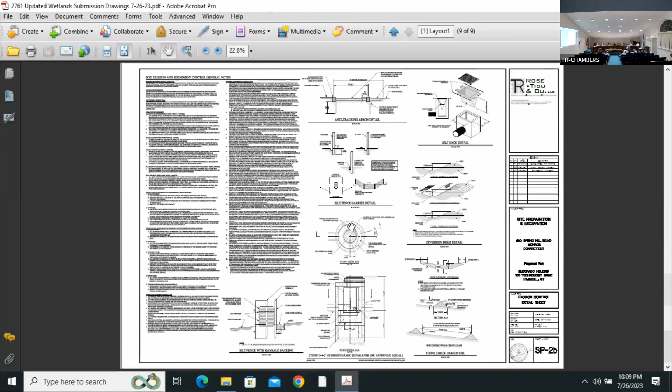You'll have more structural rigidity to it. Here's the detail of that. So basically you have your regular silt fence that you'd see on all your projects, but then we have a staked hay bale behind it to structurally hold up the silt fence, even if you have some load on it from rushing water. We used that because the slopes here are going to be a little bit on the steep side. What are the slopes right next to the tracking pad?

This tracking pad, when you come in, will allow trucks to come in and do the excavation here in the back first, then work their way forward. So we want to do the cuts first, get the site down to these plateaus, and then this fill area is going to be the last thing we do. So that tracking pad can exist here until the very end of the project.

And what's that slope going to be right next to it? I think that's 2 to 1 around there. And then the other thing is that even if we have this water treatment swale that comes here, the catch basin, the vortex unit, if that were to be bypassed, it can go to a sedimentation basin, and that will further store water, allowing further turbidity to settle into that pond, or into the soil water system.

So this area here, once we do some test pits for the septic system, that's one of the other comments, will determine the final shape of this fill area. This fill area, if there's a suitable septic system area here, we'll do our test pits prior to doing a lot of this work. The shape of this fill area can get smaller, it might actually be smaller than what we're proposing right now, just because you can't have a whole lot of fill on top of the septic system. So we would have to pull back this fill area and preserve that area designated for septic.

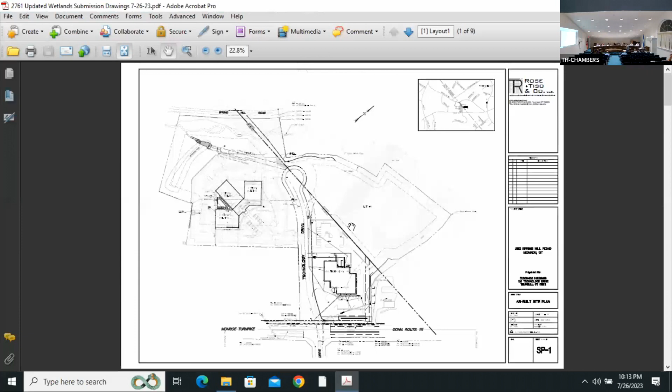I might be missing something because I'm so tired. But you don't have a building that's going on there. What is the proposed building? Do you have anything to show what's going to fit on that site?

So we have a couple of alternatives, a couple of site plans. For instance, this was a tenant we had that wanted two buildings connected with a warehouse. When we proposed this, the economy took a turn and they didn't want to come back, or didn't want the site anymore. We had another one, I think the biggest center, right? The technology center, supposed to be like a high-tech manufacturing thing. And then this was a data center. These are all prospective tenants that kind of fell through. So throughout the years, this has been trying to get developed since the 90s.

One thing is that it would excavate into the setback. No matter what scenarios we come up with, it's always been that we have an upper area and a lower area that needs to be created, either for parking in front of the building, but one common thing is there's a driveway that comes out, starting with the technology drive in this area. So what we did is we basically created a phase one grading plan to get started, so that it would be more attractive to tenants, so they don't say, I want to come onto your site, but it's going to take a year and a half before we can even start putting foundations. They want to have a site they can market that's ready for groundbreaking.

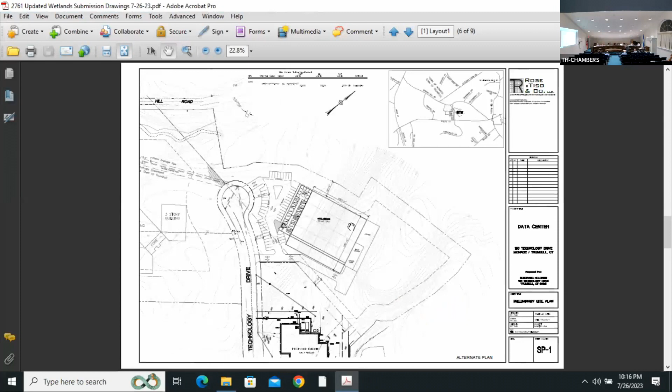Right now you have this knoll that's in here. If you look at the topo, it's not very clear on the TV screen because it's washed out, but there's a knoll there that right now the water just flows really quickly down to either the intermittent water course that flows to the south, or here's the ridge, or it goes right down to the wetland area on Spring Hill Road and into that little brook. Right now it's uncontrolled, it just sheet flows that way in a steep fashion.

So what we're doing is flattening it out to about 5% so that the water stays and doesn't rush out. This will just be a meadow condition with some swales to pick up water, so it doesn't go off property in a way we don't want it to. We want it to go through our system.

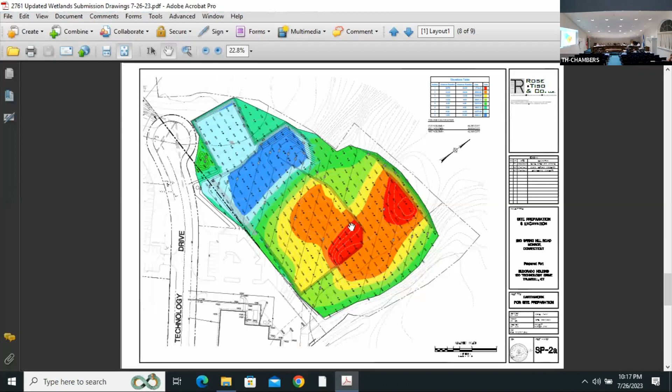Any blasting needed? That's a good question. We thought we were going to blast this site, and it ended up that we didn't do any. I don't want to say we're not going to do any here because the bedrock is very weathered, so you're able to rip it. Even if you come here to 100 Technology Drive, you can see there's a kind of cut that's rock. That's not a good representation.

There's an area here that's cut back and it's rock, but it wasn't blasted, it was just ripped apart really easily. If there is blasting, we'll go through the permits with the fire marshal, do a site survey of all the neighborhoods around, and there'll be a fully insured blaster to make sure any damage to neighboring areas, foundations, or wells is covered. You might say there's going to be blasting because of the amount of work, but we had a similar situation on 115 and there was no blasting required.

And there's a very large 7-foot pond back there that we dug into the ground. You can see the sides of it are all boulders, exposed rock, and none of that was blasted. I'm not going to tell you that it is or not, but all I'm saying is we can develop 2 out of the 3 sites and we didn't have to blast them. Good odds.